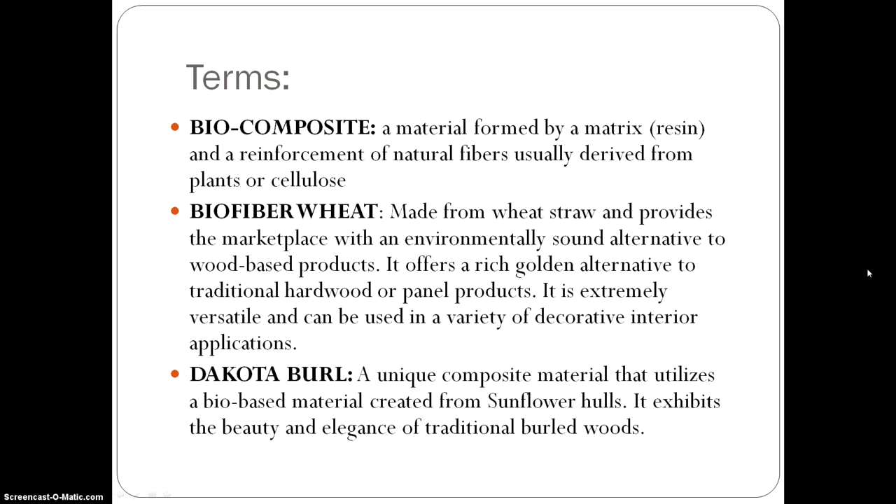Dakota burl: a unique composite material that utilizes bio-based materials created from sunflower hulls. It exhibits the beauty and elegance of traditional burled woods.

Alright, glues. Polyurethane: a type of installation glue which is highly resistant to moisture and elevated temperatures and has excellent chemical aging resistance. This is the best tool and the recommendation for biocomposite installation. Then there's also cross-linkable PVA, which is similar to PVA but with improved performance in moisture and elevated temperature. This is the second best installation product.

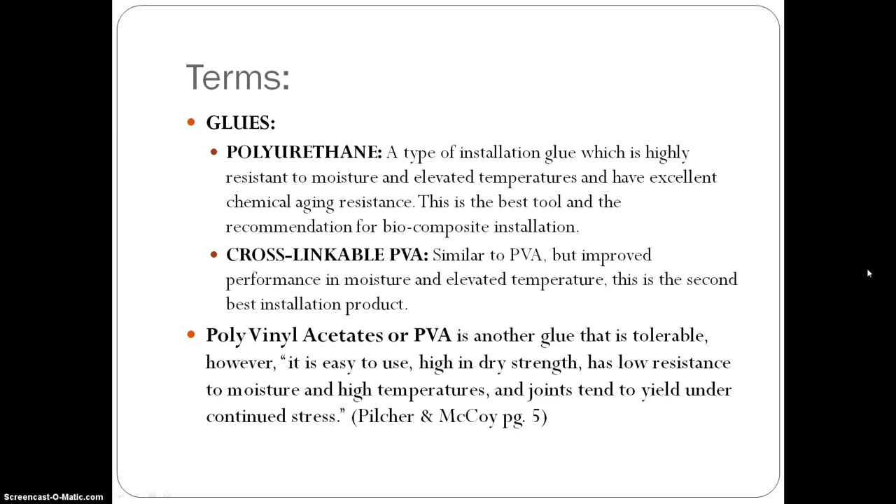And then polyvinyl acetate, or PVA, is another glue that is tolerable. However, it is easy to use, high in dry strength, has low resistance to moisture and high temperatures, and joints tend to yield under continued stress. And last but not least, microstrand. This is an industrial grade material. It makes an excellent replacement for various custom particle board and/or plywood applications.

Alright, method of measurement. Biocomposites are measured like most other wood applications. Depending on the application you are using the board for, there are two methods of measuring: by the board or linear foot, and also by the square foot.

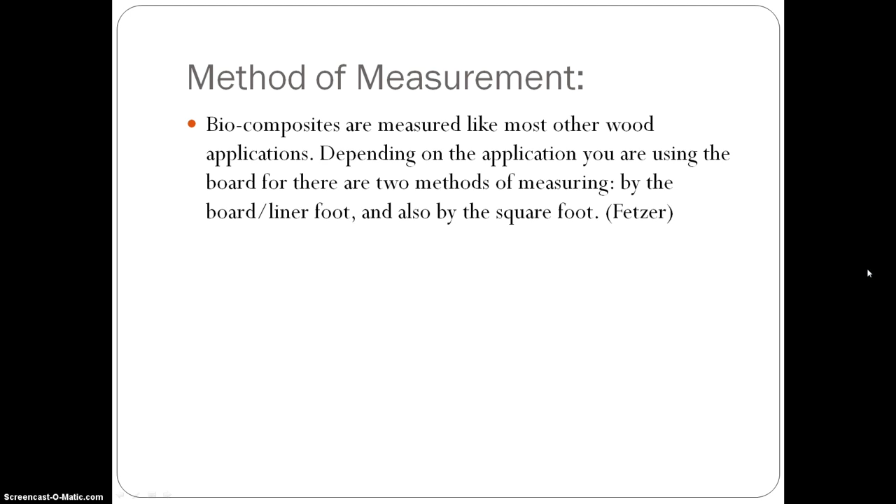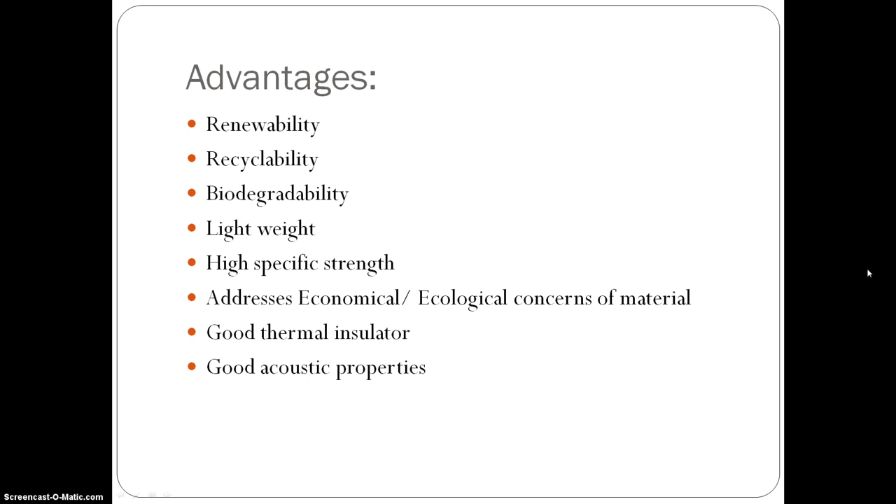So now the advantages. Some are renewability, recyclability, biodegradability, lightweight, high specific strength, addresses economical and ecological concerns of materials, good thermal insulator, and good acoustic properties. Alright, disadvantages of biocomposites are high moisture absorption, biological attack, decomposition in alkaline environments, low modulus of elasticity, and dimensional stability.

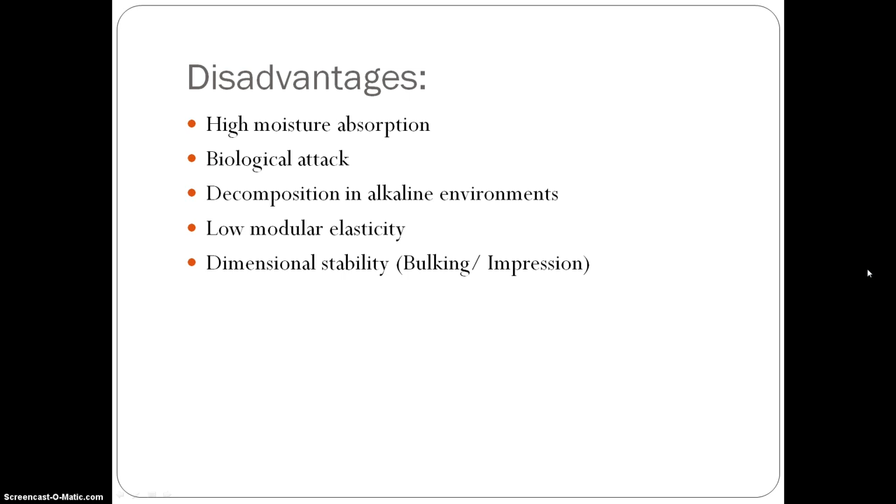Okay, so now maintenance. On the side of the screen you can see two examples of what you could use. When finished correctly, biocomposites are easily repaired and maintained. A buffing compound with a buffing wheel, or even a Scotch-Brite, as you can see on the side, can be used to gloss the surface to the desired level. If a light scratch occurs, it can be wet sanded, or a Scotch-Brite can be used to fix it.

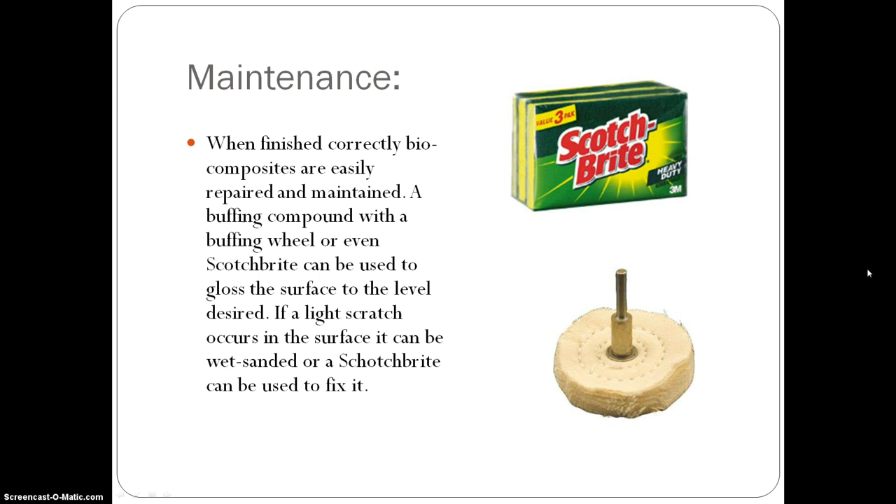Installation. Installation of biocomposites really depends on what the material is being used for. However, gluing is the installation method usually used for edge building with biocomposites. There are different types of glue used for biocomposite board, so both the physical and chemical compatibility of the board and the surface it's being glued to must be taken into account. You must consider the mechanical properties, durability, ease of use, color, and cost of the glue, and the situation it is being placed in. Here are some adhesives that are used in edge builds and seams.

Polyurethane glue, which we went over in the vocab. It's the most recommended of these glues for biocomposites. There are two types of polyurethane glue: Gorilla Glue and Franklin International Titebond Polyurethane Glue. This glue is an amber liquid resin that has a wide variety of uses. It is highly resistant to moisture and high temperature while also having great chemical resistance.

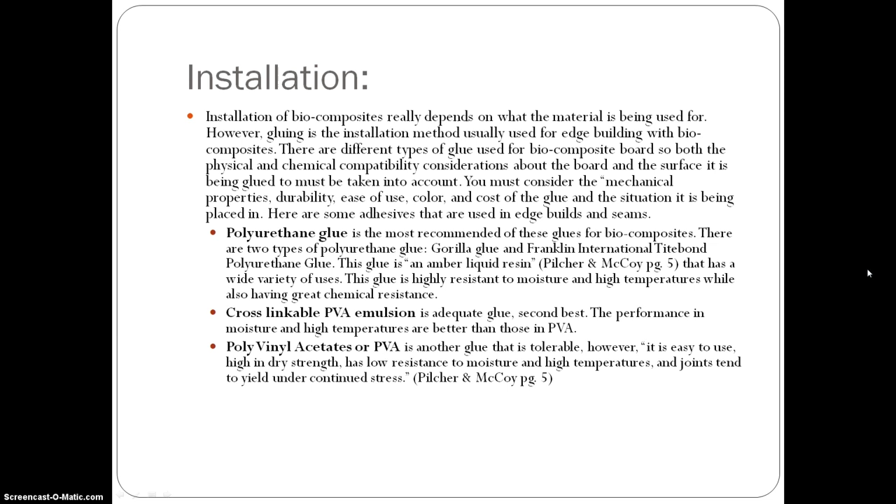Then there's the cross-linkable PVA emulsion, which is an adequate glue. It's the second best. Its performance in moisture and high temperature is better than that of PVA. And then we have PVA, which is another glue that is tolerable. However, it is easy to use, high in dry strength, has low resistance to moisture and high temperature, and joints tend to yield under continued stress.

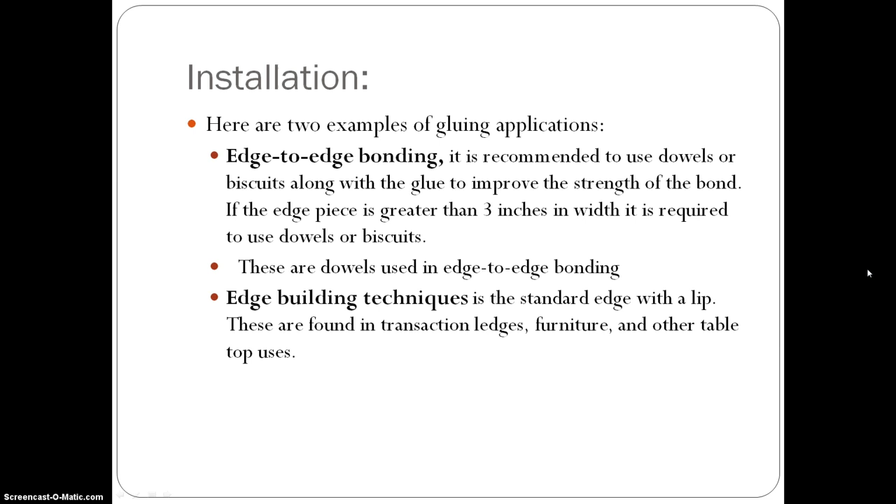Pricing. For the Dakota Burl, as you can see on this table, for 1/2 inch it's $3.05 per square foot, and per sheet it's $97.60. I won't read them all, you can see them right there. But the biofiber wheat looks to be less expensive than the Dakota Burl. For 1/2 inch, it's $2.43 per square foot, and for the sheet, it's $77.76.

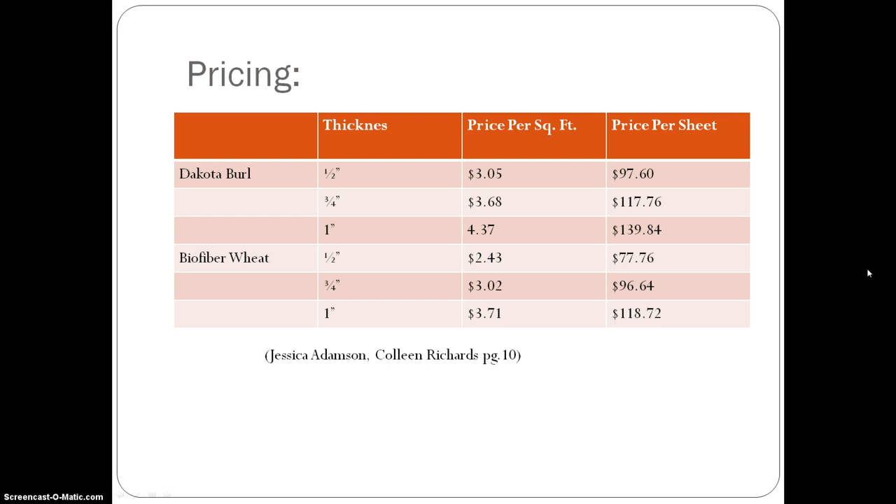Sustainability: it's one of the best renewable materials. It's made of agricultural fiber byproducts and plant and animal resins. It is not made from petrochemical resin. LEED points can be obtained for the space.

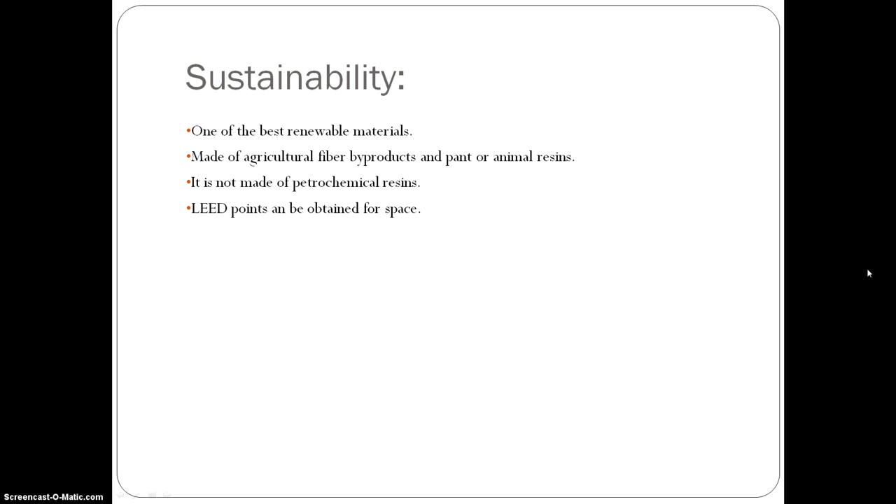That is it. Make sure that you go through the report; there are more details on everything. We've just covered everything that's supposed to be on the study guide, so make sure you look it over.